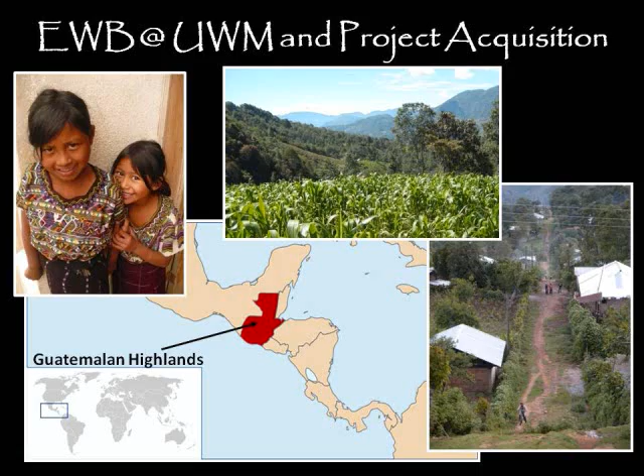In 2007 and 2009, our data collection team tested water, surveyed the land, and performed health assessments on the natives. We found unsafe levels of E. coli in their water supply. We also taught the natives the importance of washing your hands.

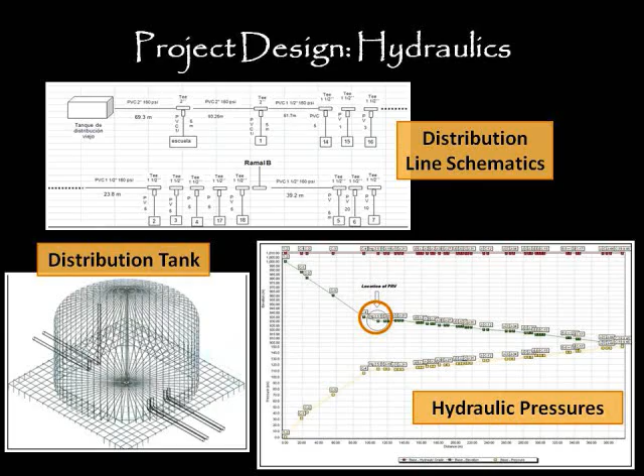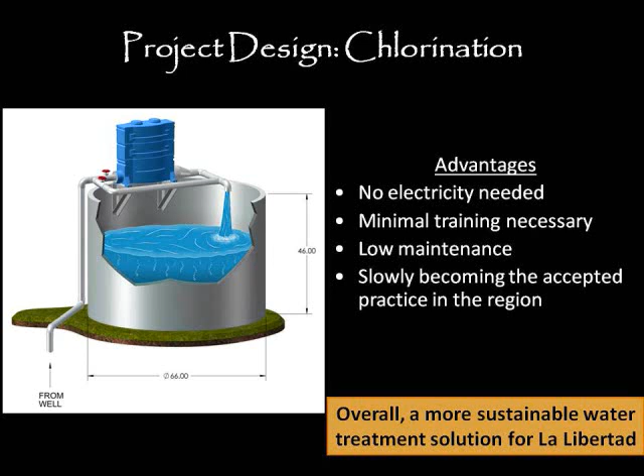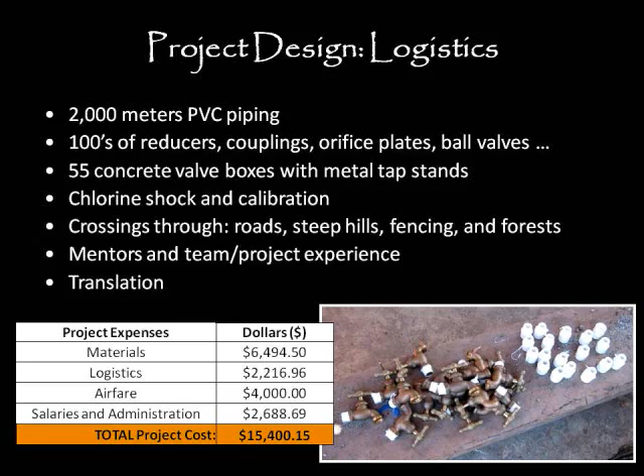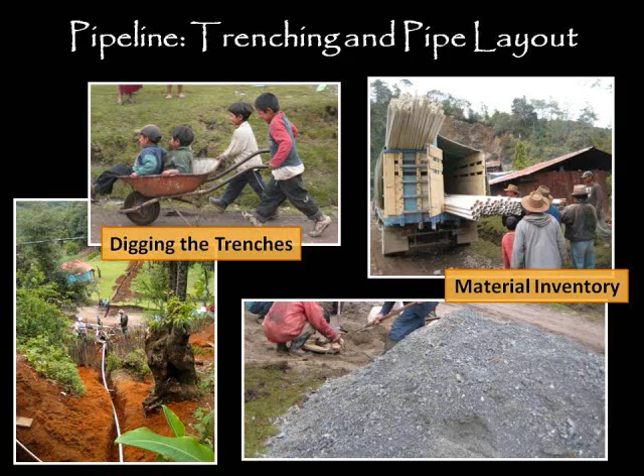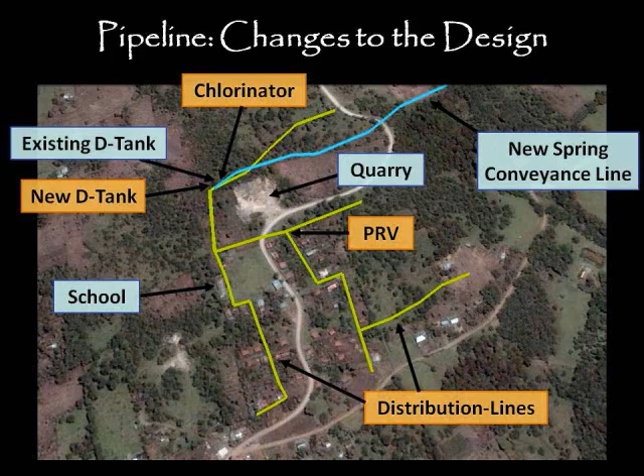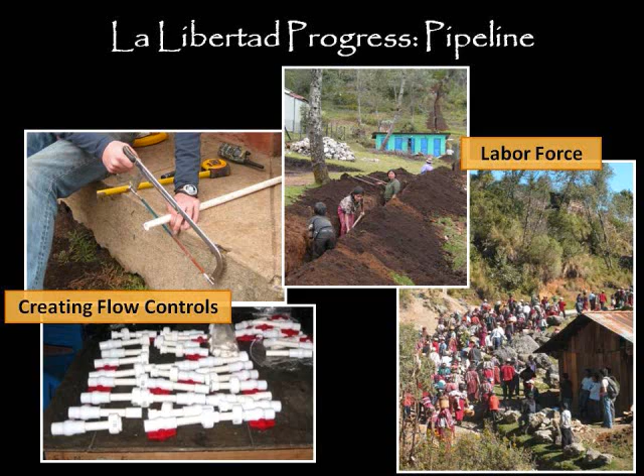We are going to run you through a few quick slides showing different phases of our construction process. This slide shows us creating flow controls to control the flow of the water. It also shows a large group of villagers who were excited to help.

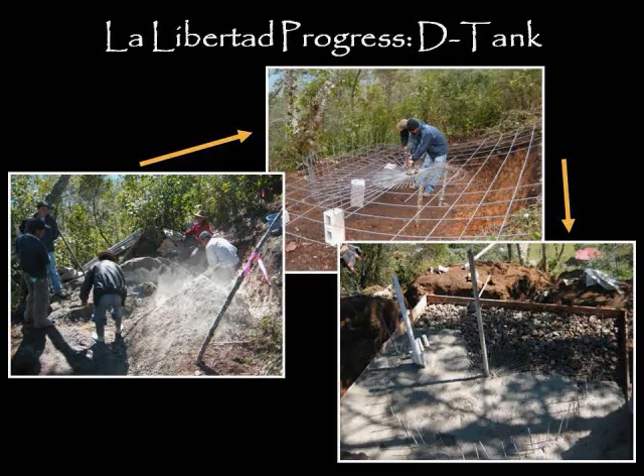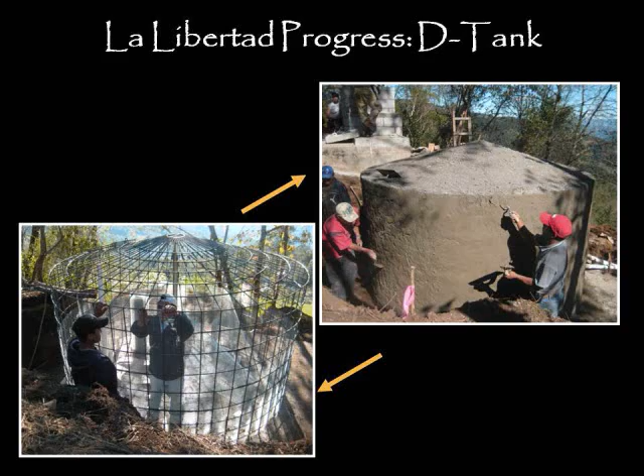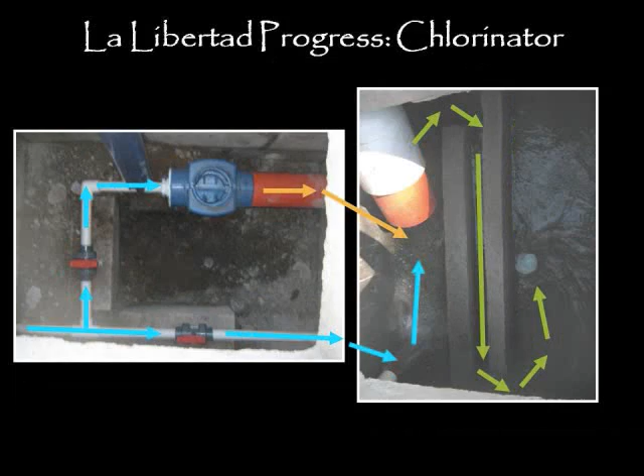Here are a few slides showing the construction of the distribution tank. And this is a picture of our chlorinator. This is a picture of the chlorinated water filling the distribution tank, getting ready to go to the natives.

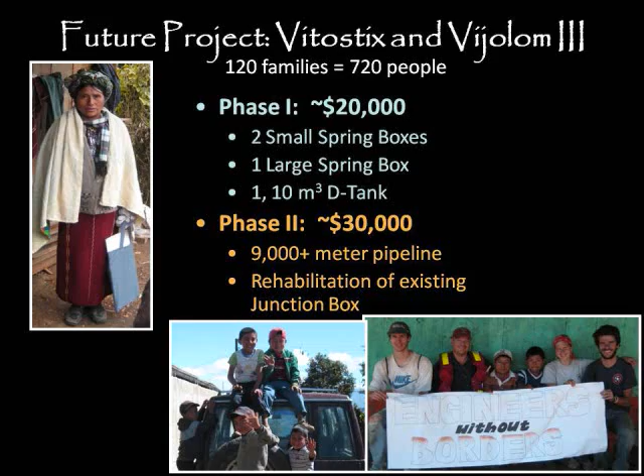When the project was finished, 330 people were provided with clean, safe drinking water. During the last trip of 2009, we sent a design team to survey land by the small villages of Vijolom III and Vitostix. This is our project for 2010 and 2011.

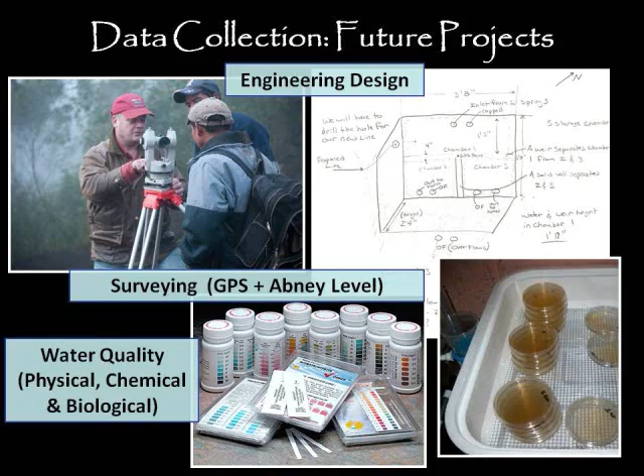To keep peace between the villages, each village uses a particular water source. To allow for this, we must use 9,200 meters of PVC piping. We will create new spring boxes and distribution tanks for each village.

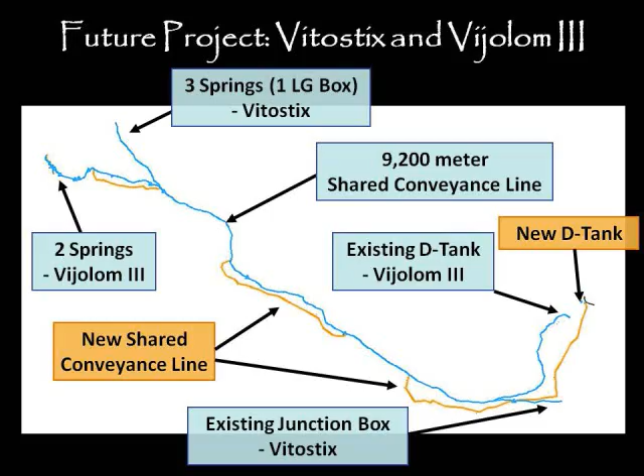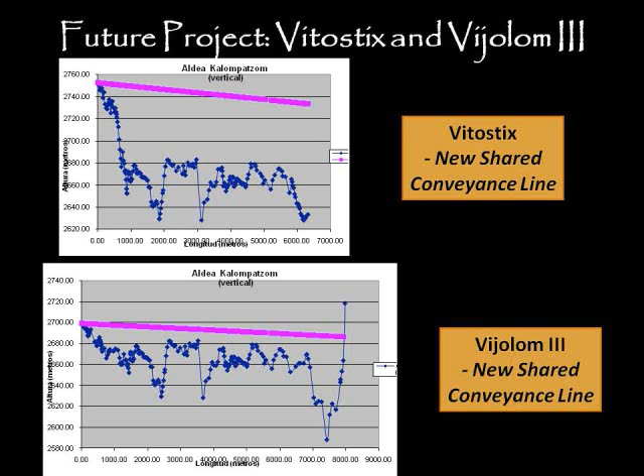This is where we need your help. As students, we can create safer and more sustainable water systems for villages like these and others around the world with the help of contributions from people like you.